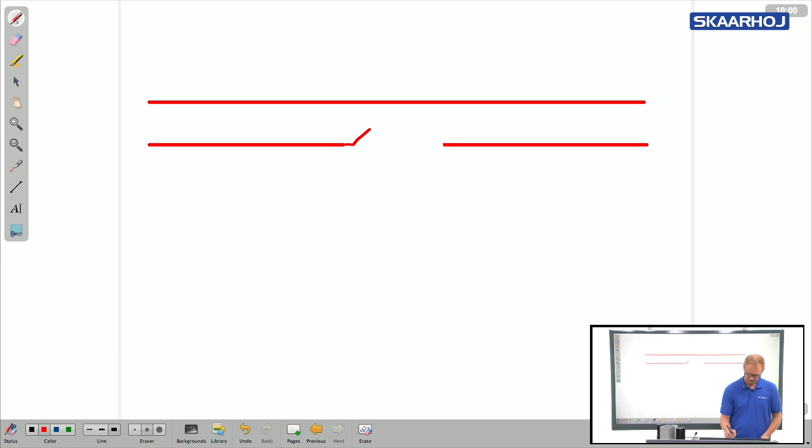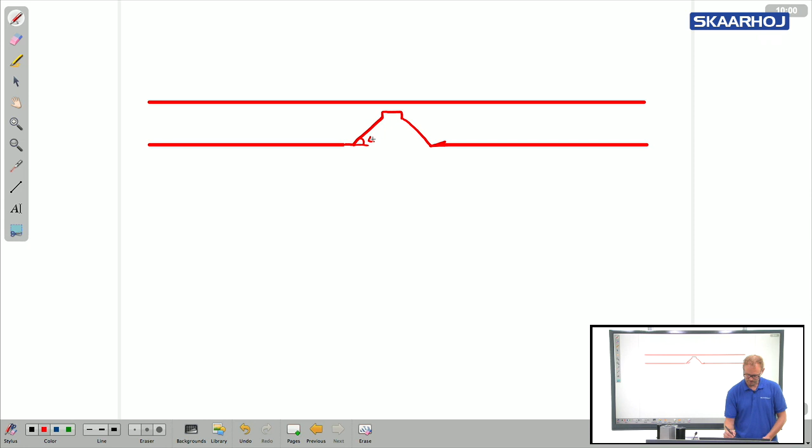We have a panel here, okay, and we have two parallel lines there, and I'll see if I can erase a little here in the middle. Okay, that was a bit more than I wanted. Just a sec. Okay, I think this is nice. Maybe a bit more. And then we have this 45-degree angle. Then on the top there's a slight slot there. Like that. Okay, so this is in the typical case 45 degrees. And the width of this is 1 millimeter. And what you have there is 0.5 millimeter of metal.

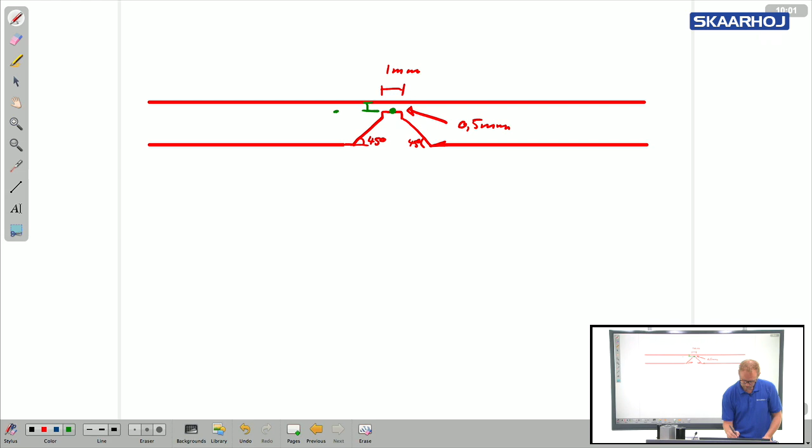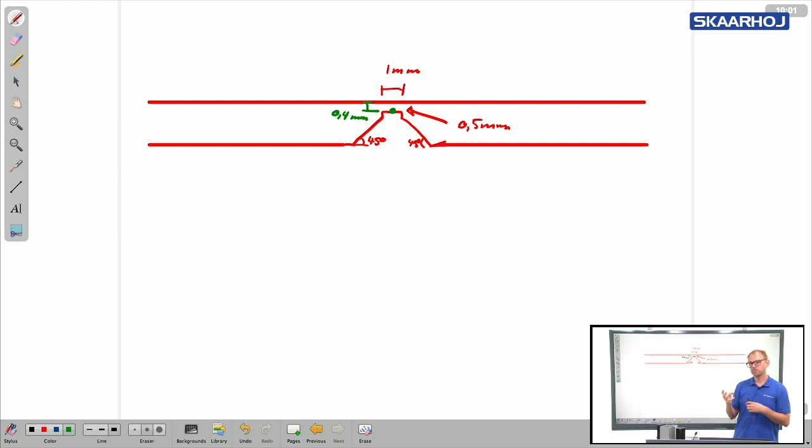So around this cavity with the bevel, we bent the panel in the case where we bend it together in this direction. And the assumption that we make, and which is grounded in my experience, is that we have a point, a radius or center point for the bend, which is located 0.4 millimeter from the outer surface of the panel. It may also be 0.5. I have also, in some cases, had 0.6 measured as the right distance.

In fact, you may argue that this point where it's bending around might be in the bottom of this cavity, the cavity right here. Let me just zoom in a little bit. You may argue that it is right on the edge of this cavity. And I think it's difficult to say because Schaeffer has a tolerance when they mill these panels. So it's like 0.1 millimeter. So if a cavity comes from Schaeffer as half a millimeter left or 0.4 millimeter left material or 0.6 millimeter left material, it's hard to say. But generally, the 0.4 millimeter is the assumption that I'm using in my scripts.

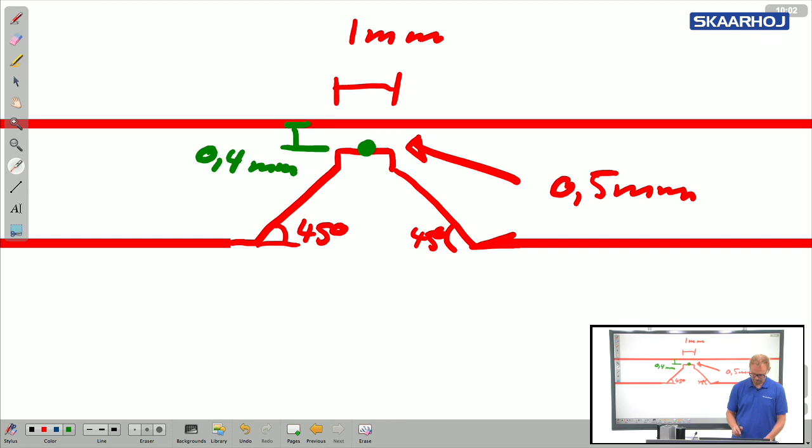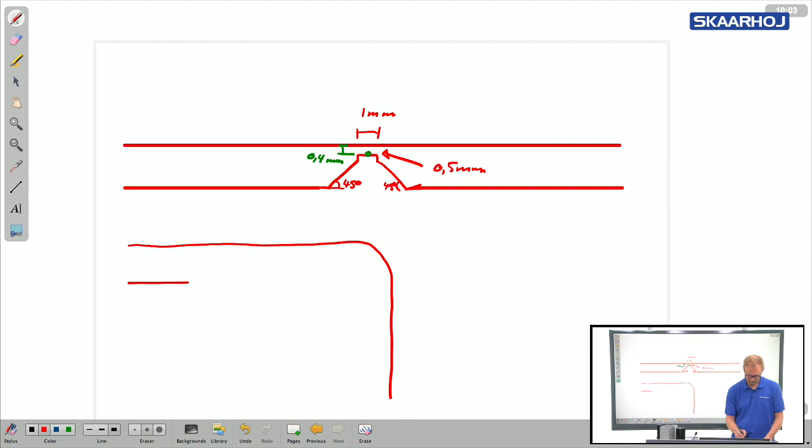So what is exactly the reason for this assumption? Okay, let me show you what happens when we bend the panel. So I'll have to do this as a freehand drawing then. Okay, so we have the same, I'm going to choose the red color again. I have the same panel. And then this is the point where it bends, like that. And then it will look like this. And you may also be able to see this on my videos. You can see that this is in fact how it usually looks. Okay, so the center of the bend is there.

And actually what happens is that the metal is stretched around the upper surface. You can actually see it if you look closely at the bend here. The metal is stretching so that on an anodized panel like this, you are in fact destroying the surface because you're pulling it apart. And if you look closely, you can see the raw aluminum underneath. However, my feeling is when I look at these panels, I've made many panels in various colors, it's not a big deal. It's not something that you notice and which kind of spoils the day. But that will be up to you to decide, of course. You'll have to try yourself. But I'm just telling you that actually, because we are bending around the green point on this drawing, we are pulling the material apart on the upper surface.

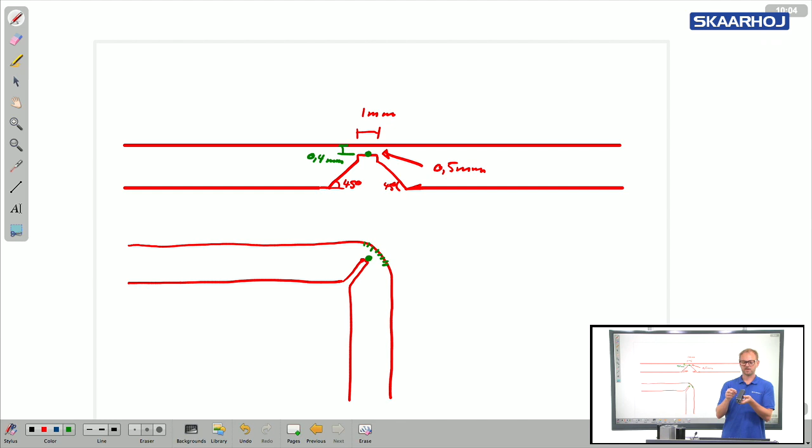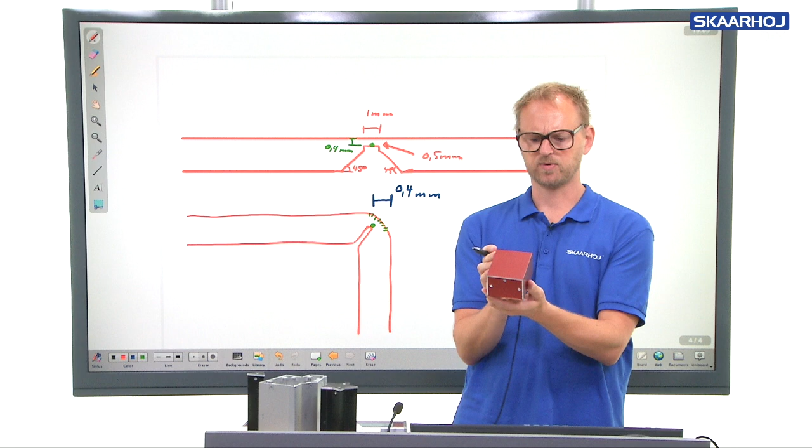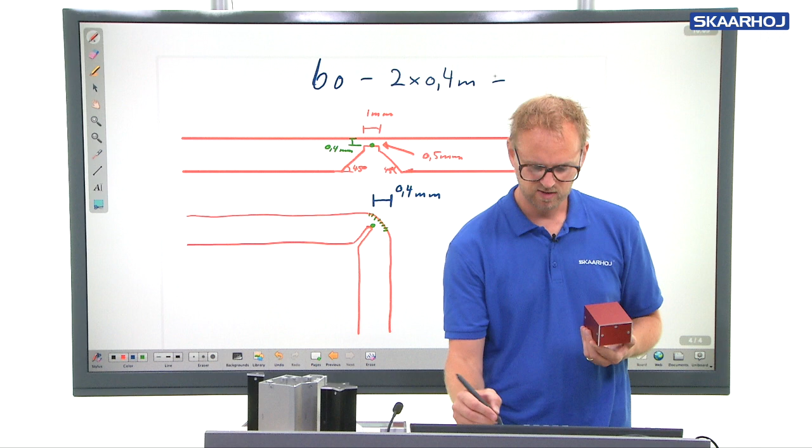So it actually means that when the scripts we made at SKAARHOJ calculate the width of a box or a U-box, for instance, or in this case, I just pick the U-box here. When it calculates the width of this box, the distance between the center of the cavities will have to take into account that from here to this edge, we have 0.4 millimeters radius on this side and also on the other side. So actually, if you look at the Schaeffer files for this box, and this box is 60 millimeters wide, you will see that the distance between the cavities for bending will be 60 minus 2 times 0.4 millimeters equals 59.20 millimeters.

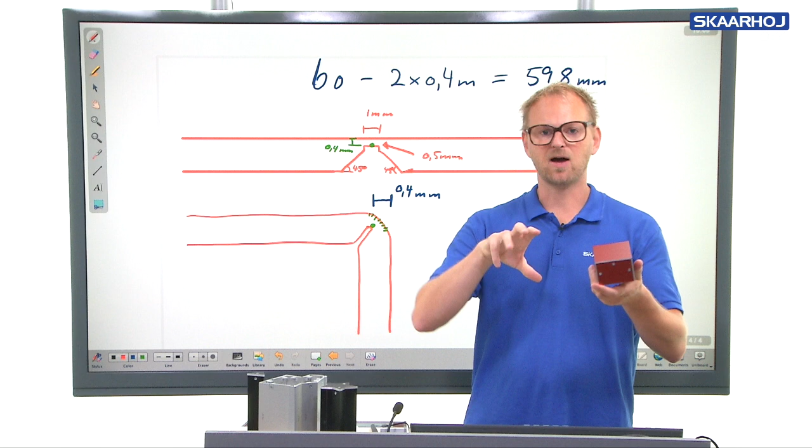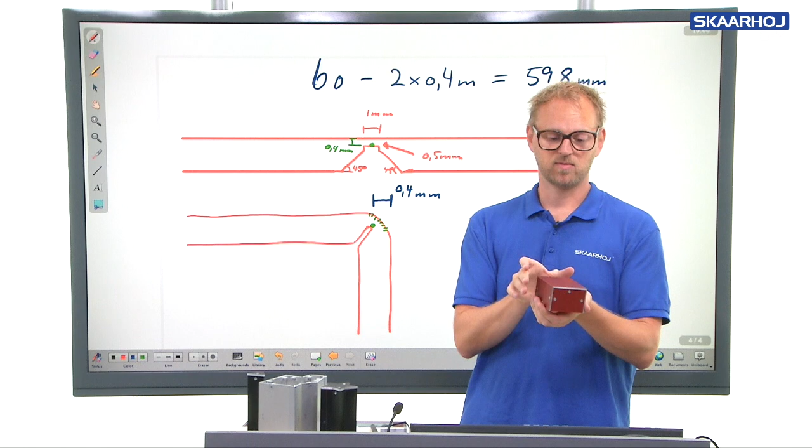So that's basically the assumptions, and there's a parameter inside the script. So if you find that for some reason the bendings are always too tight, it seems like your U-boxes, for instance, when you bend the panels, are always smaller or larger than the width you wanted, probably you need to adjust this parameter.

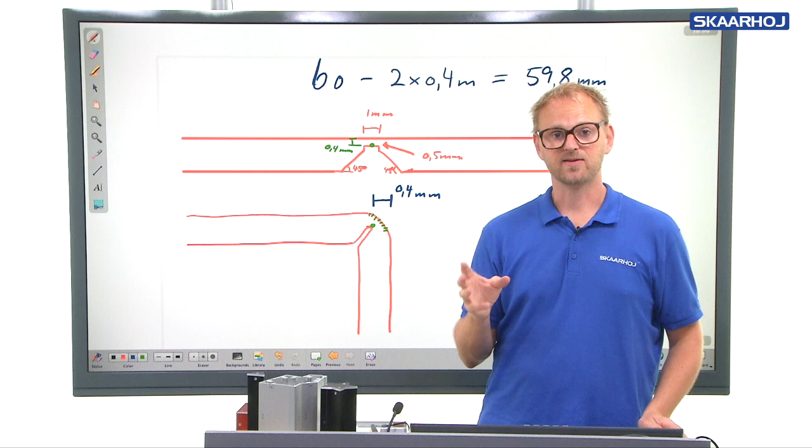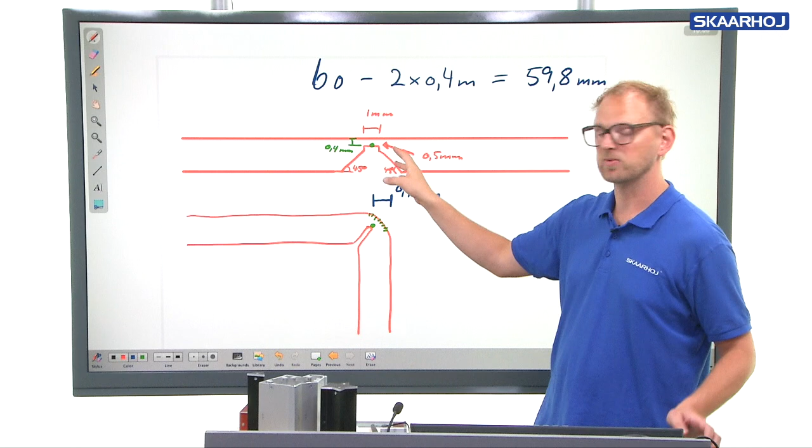Okay, so let's take a look at where that is implemented in the script and confirm that what I just stated about this U-box is actually true in terms of the distance between the cavities in the box. We're back in Front Panel Designer now, and I pulled up the panel that is forming the top of this box. It turned out that it was not 60 millimeters wide, it's actually 80, but that doesn't matter.

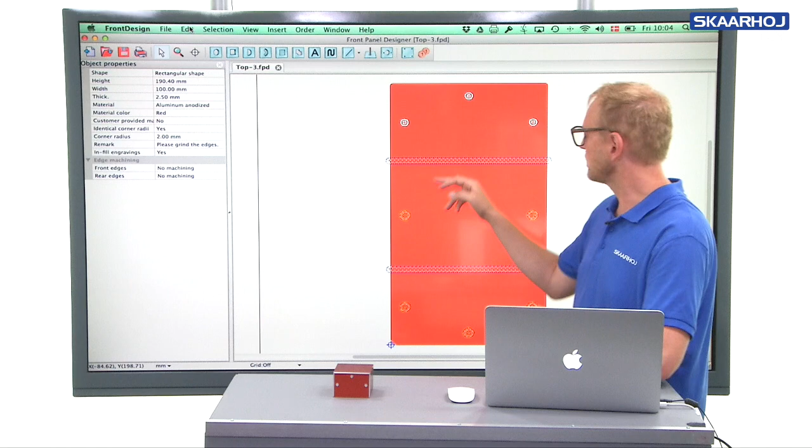What you remember from my drawing is that from the 60 millimeters we want the box to be wide, we needed to subtract 0.4 millimeters on each side for the cavity, for the bending radius. So the two cavities here and here on the panel should be 0.8 millimeters less apart than the width of the box, the 80 millimeters. So let's see if that's the case.

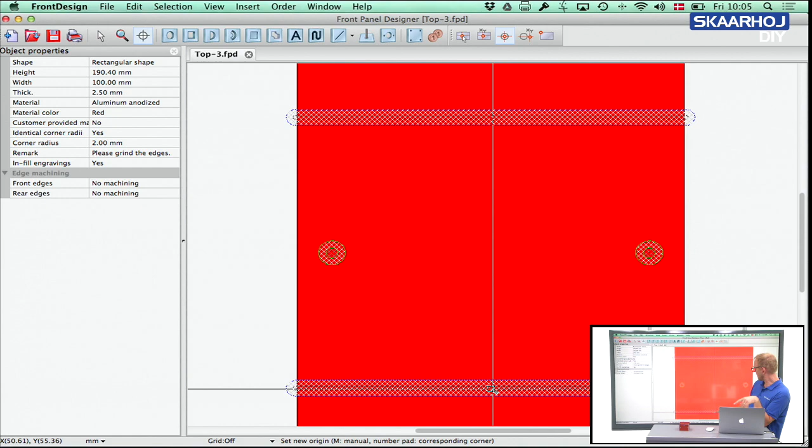To determine that, I usually set an origin of the coordinate system on the center of one of the cavities. If you'll excuse me, I'll just change the color of the panel from red to something more contrastful. So here on the black panel, you can see if I select the center point of this cavity, it will place the origin of the coordinate system there.

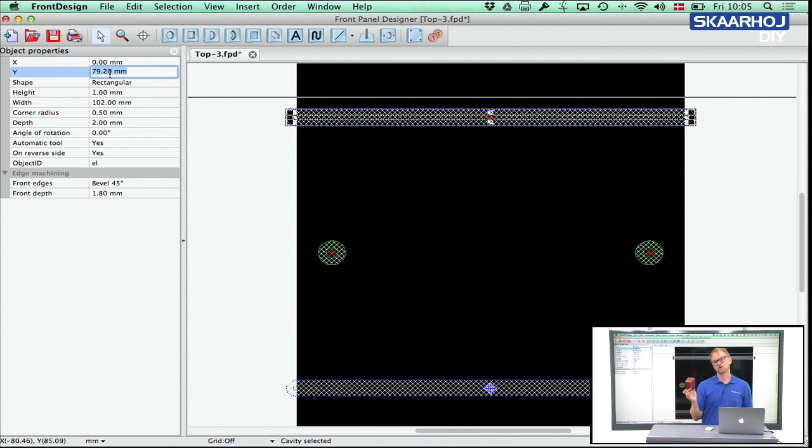And all I need to do is to select this cavity up here, and you'll see that the y coordinate of this cavity is 79.2 millimeters, so it corresponds with my claim. And this comes from the parameter in the script. This was created by the U-housing script.

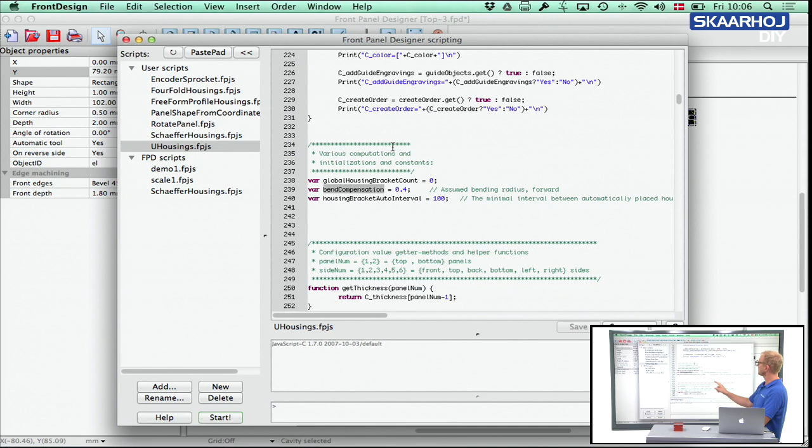So if you open the script and you scroll down, far beyond the user section, basically, you see here we have various computations and initializations and constants. And the bend compensation is set to 0.4. It's the assumed bending radius for a so-called forward bend. A forward bend is when I bend the panel like we do for U-boxes.

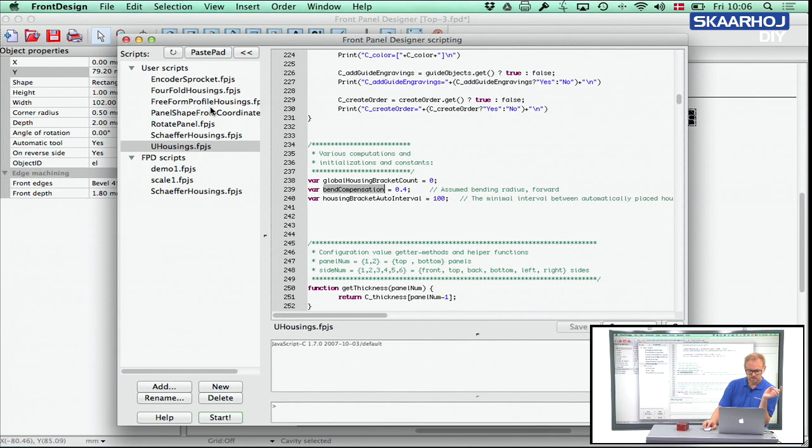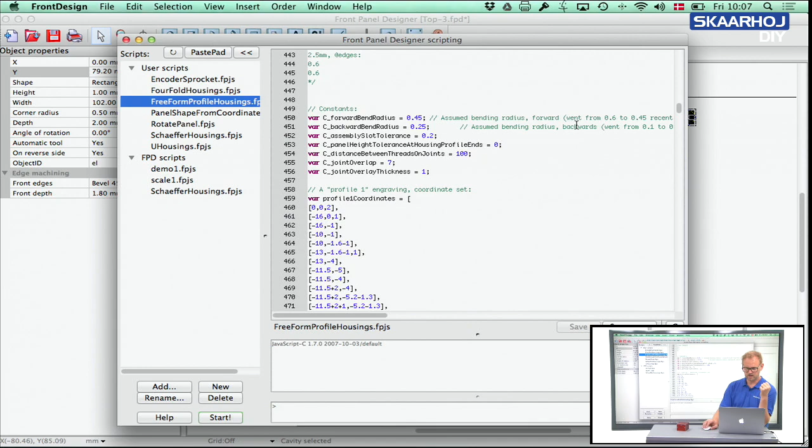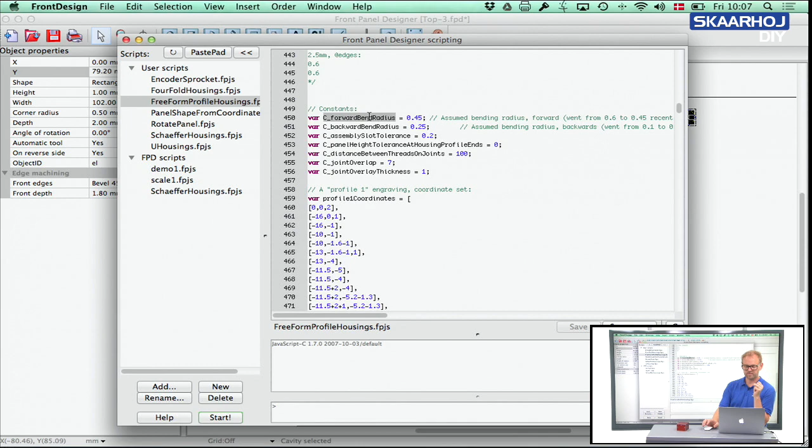If you open the free-form profile housing script, you find a similar parameter, both for the forward bend but also the backwards bend. So if I scroll down, see if I can find it. Yeah, there we go. Constant. We have something called a forward bend radius and also a backward bend radius. The forward bend radius is 0.45. And the description is the assumed bending radius for forward bends.

As you can see, I noted down that recently I actually changed this parameter from 0.6 to 0.45 because I found that fitted better with the reality of the many tests that I've been doing. But this setting is the one I've been using for all these panels, and it seems to work pretty well in most cases.

As I also mentioned when I did the drawing, one of the variable issues is that the tolerances from Schaeffer are only guaranteed within plus minus 0.1 millimeters. So even though you want to tweak these parameters, it might also depend on which CNC machine they use to mill the panel and the tolerance of that particular day or setup.

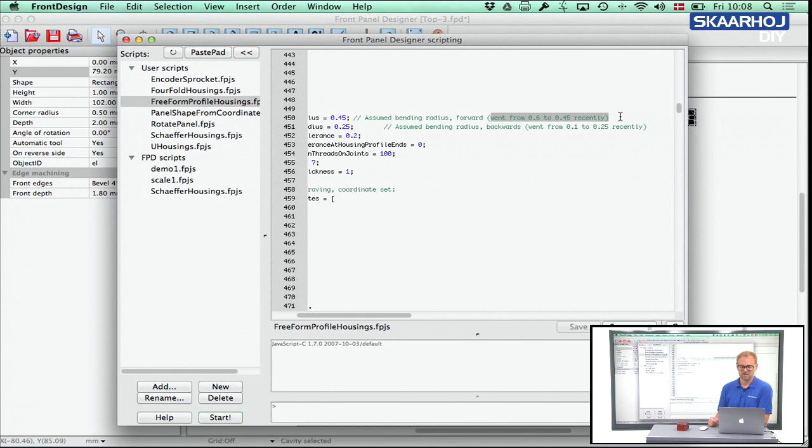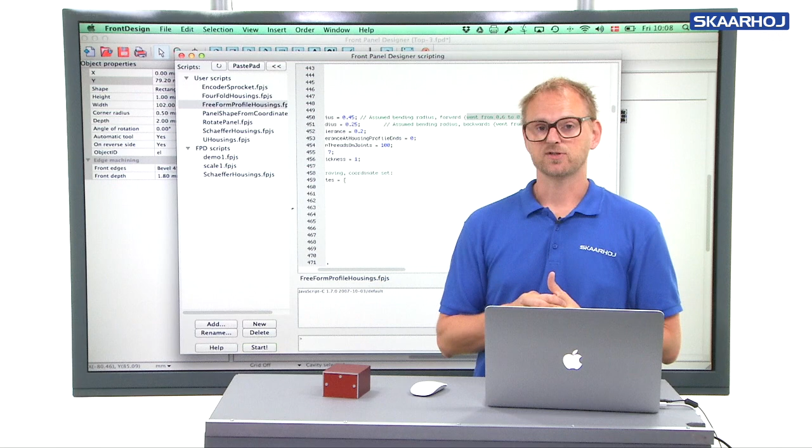Yeah. So that was the theory behind bending front panels after the concept I've explained here with the beveled cavity, which is used in the free-form profile housing script as well as the U-housing script. A final note about if you want to bend panels the opposite way of what is the case for U-boxes and everything else. Sometimes you may want to do that.

Okay, so normally, and now I'm just showing you, normally we have this sort of cavity when we are bending the panel like that, but now we are bending the other way, so we don't need a cavity like that. Actually, all we need is a cavity which is just the 1 millimeter cavity like that. There's still 0.5 millimeter material left here, but the assumption that the script makes is that we are bending basically on the surface of the panel.

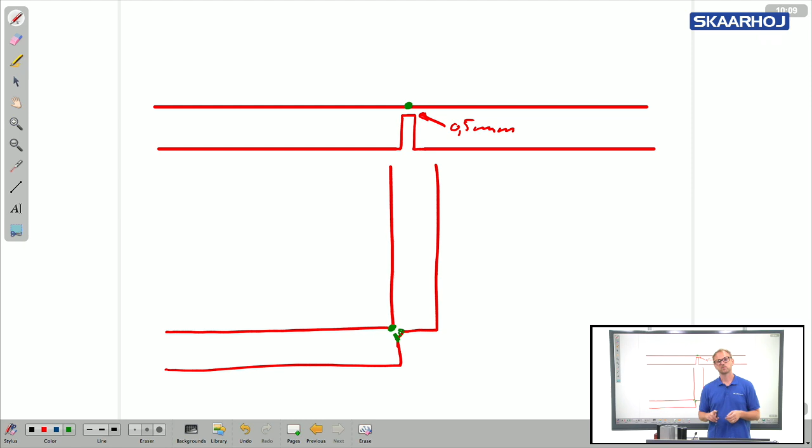And the stretching of the metal, of course, will happen right here. This is where it's pulled apart. But generally, the assumption is that it will be exactly on the surface of the panel. But that's also a parameter you can adjust in the scripts.